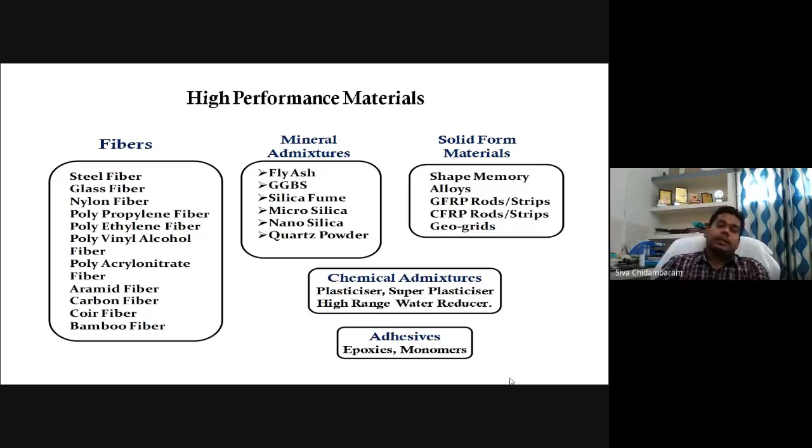According to the required performance, you can choose different types of materials. The materials can be of anything - admixtures in terms of mineral or chemical composition. Apart from this, there are many materials that can be effectively used in the construction field. Many of them are practically applicable, many are still at research level, and many materials are quite expensive, so we have to choose the right location to use them. Let me cover a few of them, since I won't cover everything as people will get bored. First I will talk about fibers, then solid forms, and third, adhesives.

If you look at old buildings, the roof will be a pitched roof, or a flat slab based, like a lime mortar based slab, supported by wooden planks. If you closely look at the wooden planks, they may have been made using a palm tree, otherwise teak wood. If you go to the northeast, the entire structure is made using bamboo.

The reason for choosing only this kind of material is that coconut tree wood can be used, but it has no long life period. So generally, palm tree wood is preferred for making planks. If you look at any pitched-roof old buildings, there you will find palm tree wood instead of coconut tree. Coconut tree wood can be used only for a shorter period; it doesn't have much more lifespan.

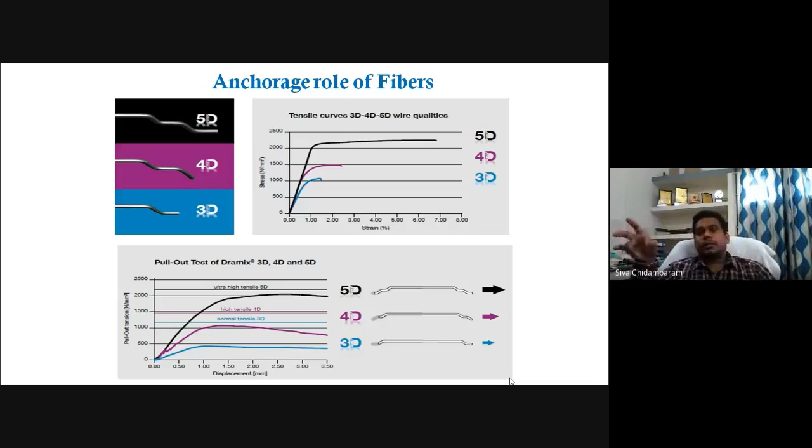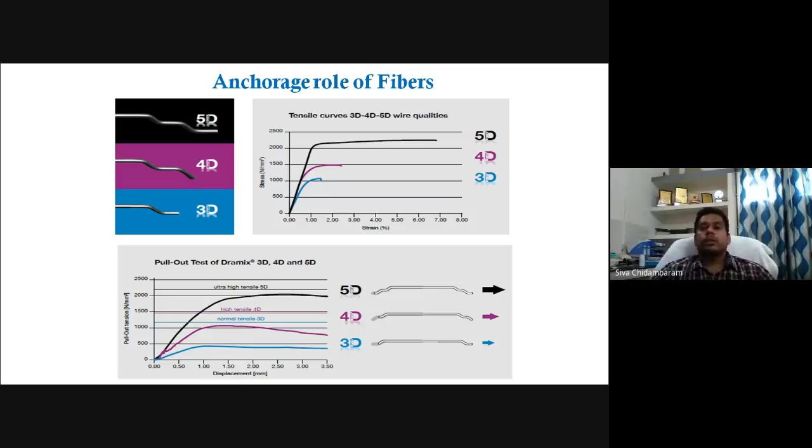Now, if you construct a bridge without abutment, with only the span portion, it is not a perfect one - it should be anchored with the embankment. But anchoring in fiber is nothing but the end profile of the fiber. In hook-end fiber, the end portion has some deformed shape, and with respect to that deformed shape, it gives wonderful anchorage that increases the efficiency of your fiber. But in case of crimped fiber, the shape of the fiber itself gives wonderful anchorage. This is called a crack bridging effect.

When we use these kinds of fibers in our concrete, they bridge the cracks at multiple levels - not at a single point, because the fibers are randomly distributed and randomly oriented. Micro level, nano level, macro level - all the cracks will be bridged by the fibers, trying to transport the stress from one point to another. This is called the fiber crack bridging mechanism.

So why am I telling you all these things when talking about high performance material? The material is a common material which can be used effectively to improve certain performance - ductility, durability, strength, energy dissipation, and crack sealant, which is called the self-healing property of material. So these are the various materials that are available.

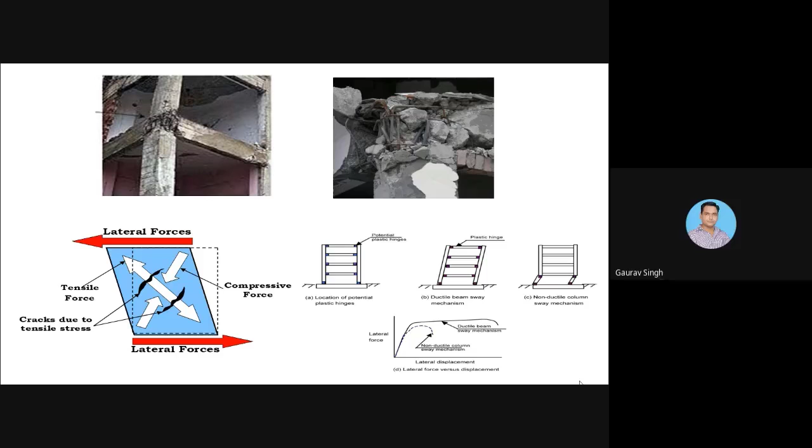When you are considering a structure subject to a large amount of lateral force, our earthquake resistant design philosophy says that we have to go for a strong column, weak beam, so that plastic hinges will form near the beam, not in the joint, to avoid global failure.

When you are using a soft story, plastic hinges should be formed in the conventional way - it should not form exactly below the first story column, to avoid soft story failure. So we have to follow certain IS 1893 guidelines to increase the shear carrying capacity of your soft story building.

So when you do all this design procedure and detailing procedure, we can have wonderful earthquake resistant buildings, but the concrete remains the same - it is a very poor ductile material, a pure brittle material. Even when we reinforce with reinforcement, we are increasing the flexural capacity of the member, but instead we have to use certain material which can increase the tensile carrying capacity of your concrete.

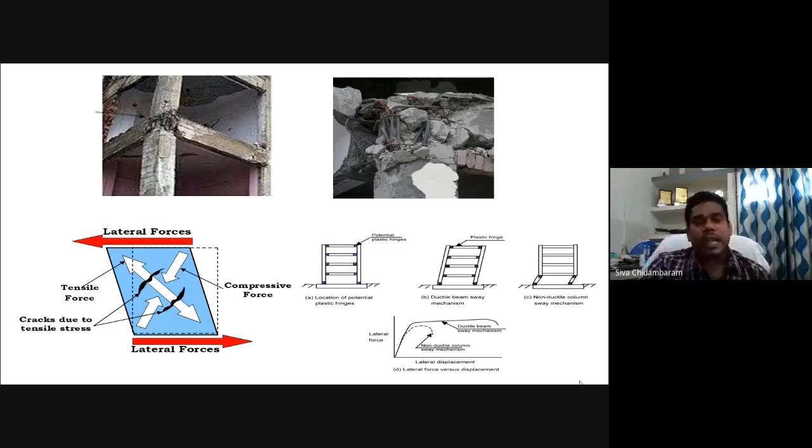When your concrete has wonderful tensile capacity - because prior to this, we should know why the crack is occurring, how the crack is occurring, how the crack is traveling. When you have a large amount of lateral force, concrete is subject to alternate compression and tension in the joint.

So when the applied stress exceeds the tensile stress of concrete, then you can expect a crack. Same phenomena for all the cases. Suppose if my tensile stress of the concrete is 2 megapascal, and the applied stress exceeds 2 megapascal, immediately crack will occur. Till then, the crack will not appear.

So when the crack starts to grow, when the applied stress exceeds the tensile stress of the concrete in every level of your RC elements, the crack will grow and keep on growing. When you measure the stress at the tip of the crack, at the opened level, the tip will have a higher stress level compared to the bottommost crack region. This is called a stress intensity factor.

So crack is generally a good sign in RCC elements. If crack is a sign, like a fever to a human body, crack tells you something is happening to the RCC element. Instead, a building can fail in an abrupt way, which is generally not advisable. So crack is a warning.

So if you are able to treat, if you are able to identify the reason for the cracks, then we can easily retain the structures.

Apart from that, we are doing a lot of mistakes like poor detailing. We are simply playing with the detailing. We say it is very difficult to go for closely spaced stirrups near the joint at the plastic location. We are not able to provide longitudinal anchorage, and we give a lot of useless reasons when it comes to the construction stage.

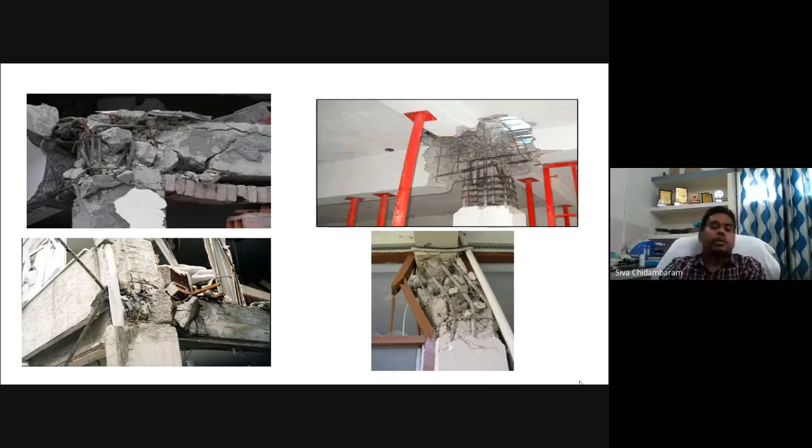But we have to. It can be possible. So to avoid all these kinds of failures, construction people are still not ready to come forward, but the research community is ready to go forward. So they have identified some materials that increase the performance of the element even with some construction errors.

So this is how a plastic hinge is formed. And when you are expecting a plastic hinge at a particular location, my element is going to have a large amount of rotation. So energy dissipation is going to happen, and damping of the entire structure depends on each and every plastic hinge capacity.

Everything depends on the plastic hinge. So I have to improve the performance of the plastic hinge in terms of displacement, energy dissipation, damping, and ductility. So if I want to increase all this capacity in the conventional way, I only have concrete and reinforcement. Apart from this, I don't have any other options.

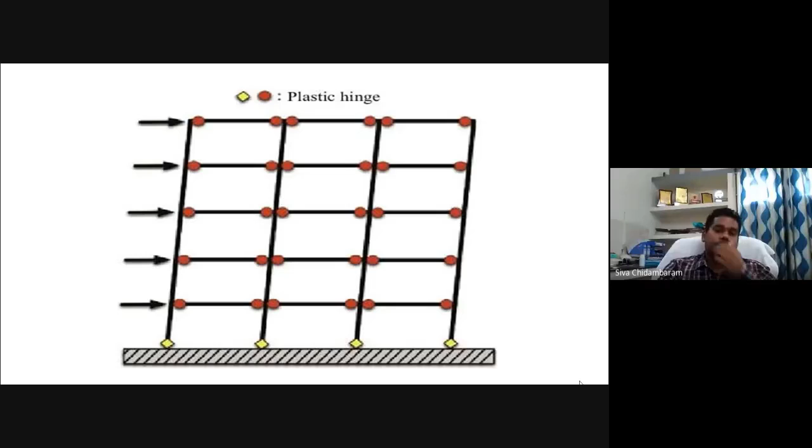You can go for closely spaced stirrups, but even then, crack will occur because of concrete. So now the case comes if I use some fibers, I can increase tensile stress and strain. Strain is very, very important, more so than stress. So what will happen here? A high strain material can help you attain wonderful ductility compared to a high stress material.

So that is called high strength material versus high ductile material. Ductile material will help you. So if you want to arrest all these cracks, we have to use some types of fibers. That's the first option, so I'm going to talk about fibers first, followed by different materials.

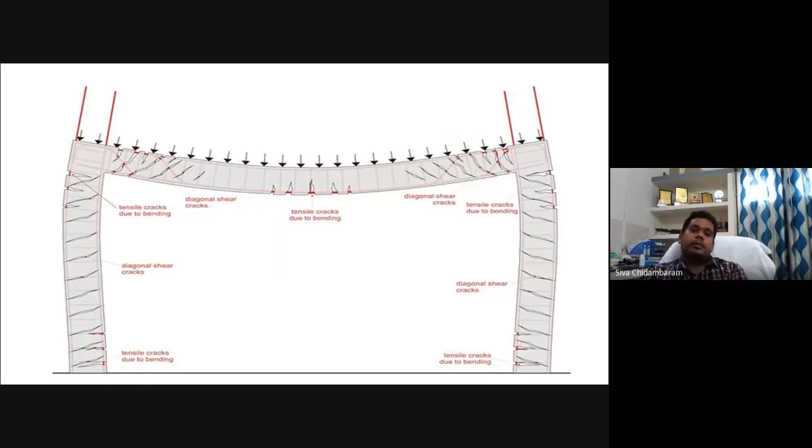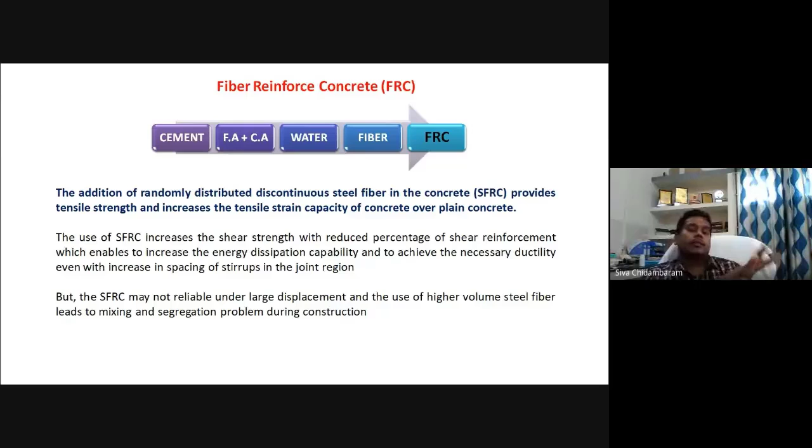In conventional fiber concrete, if you add fiber, that is called fiber reinforced concrete. Conventional concrete can take a certain amount of fiber, not more than 2% of steel fiber. If using synthetic fiber, not more than 0.5%, as that creates a lot of workability issues. When you add fiber, concrete cracks get arrested, and generally the crack will not grow very rapidly because of the presence of fiber. So fiber will bridge the cracks and not allow them to grow rapidly.

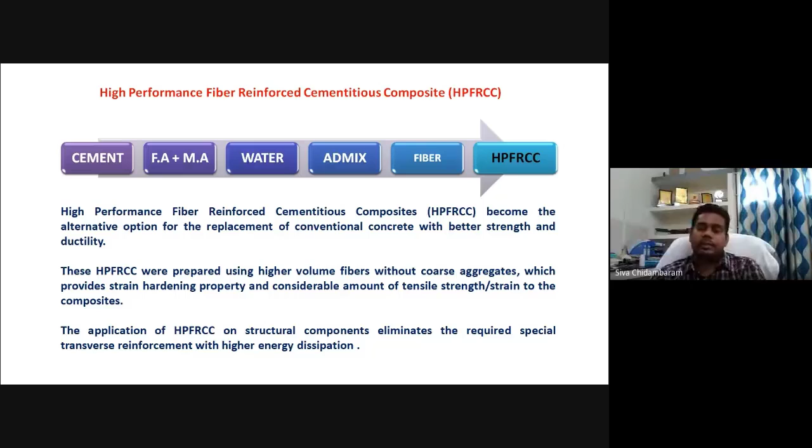Another one is called fiber reinforced cementitious composite, in which cement, fine aggregates, mineral admixtures, and water admixtures plus fiber are used. Here I am not using coarse aggregate, because coarse aggregates are the very big culprit in deciding the dispersion capacity of your fiber. When you use coarse aggregate, that significantly affects the fiber dispersion property. That's the main culprit, which is why in conventional fiber reinforced concrete, we are not able to go more than 2% of steel fiber.

So in a study conducted by myself, we used fiber reinforced concrete and fiber reinforced cementitious composite. If you closely look at the stress strain diagram, you can understand the stress of fiber reinforced concrete is higher than the stress of fiber reinforced cementitious composite, but the strain is 2 times higher than the conventional fiber reinforced concrete. So what happens when it comes to damage capacity?

If you look at the bottommost cylindrical sample, you can identify the different type of failure pattern. Conventional concrete falls apart, fiber reinforced concrete holds the cracked portion together. The composite is also holding, but crack intensity is not much. That is the beauty of fiber reinforced cementitious composite.

Similarly, for tensile strain capacity, look at the topmost graph. Conventional fiber reinforced concrete's ultimate tensile strain capacity is just 0.004. When it comes to this composite, achieving 0.02 strain is not an easy task with conventional fiber reinforced concrete. This is why it is called a high strain material, sometimes termed a strain hardening material. Okay, let us come to the flexural case.

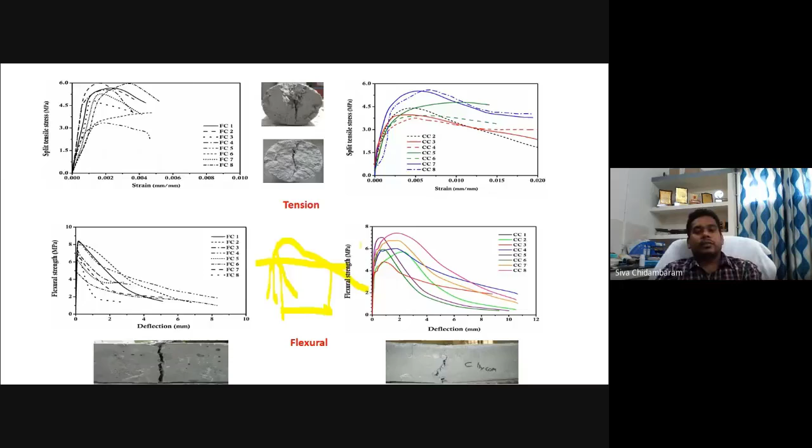So I'm not talking about fiber reinforced concrete. This presentation talks about fiber reinforced cementitious composites. There are many types of composites. I'm going to discuss only a few of them.

One is called slurry infiltrated fibrous concrete. It's very old, from 1984. This composite was invented to resist the impact force caused by missile attack in the United States, by Professor Lankard, in which we are not using reinforcements, we are using only steel fibers in higher volumes.

In conventional fiber reinforced concrete, you can't go more than 2%. Here you can go from 5% to 30% steel fiber, depending on your economic criteria and requirement. It's one of the high ductile, high impact resistance, high toughness, high energy dissipation, high damping materials, whatever property you want.

100 megapascal concrete, just like this, you can easily attain with this. And the flexural strength to compression strength ratio is very high, it's unimaginable. These are various advantages of SIFCON, in which the fiber will be randomly oriented or perfectly oriented in a layer by layer manner, and then slurry will be infiltrated.

The second layer will happen, slurry will be infiltrated, the third layer will happen, again slurry will be infiltrated. So this is how we have to make it.

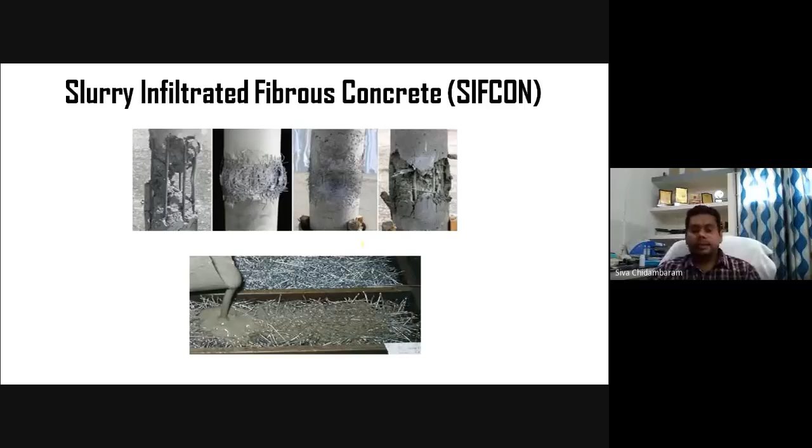So it has a lot of restrictions, like the formwork should be plug free, it should be leak free, number one. So a perfectly made formwork is number one. We should not use a compact vibrator to vibrate this, only a small amount of vibration has to be done. If your slurry is infiltrated improperly - slurry is the backbone of your SIFCON - then you can't attain the desired performance. So there are a lot of limitations.

Apart from this, it has wonderful applications in construction using this composite. If you want to make a beam or column, these are very critical things. So wherever it is possible, like impact resistant slab panels, can be easily made using this. Nowadays we have some advanced instrumentation and equipment to disperse the fiber, so now we can try, but the orientation of the fiber is very difficult.

Because in SIFCON, fiber orientation matters - whether it is perpendicular to loading or parallel to loading - depends on the orientation, the performance varies. If you look at the stress strain curve, one curve shows that parallel to loading gives lesser stress and strain compared to perpendicular to loading. Perpendicular to loading, you can look at the second image - here fibers are oriented perpendicular to the loading, here fibers are oriented parallel to the loading. So with respect to this, the performance varies.

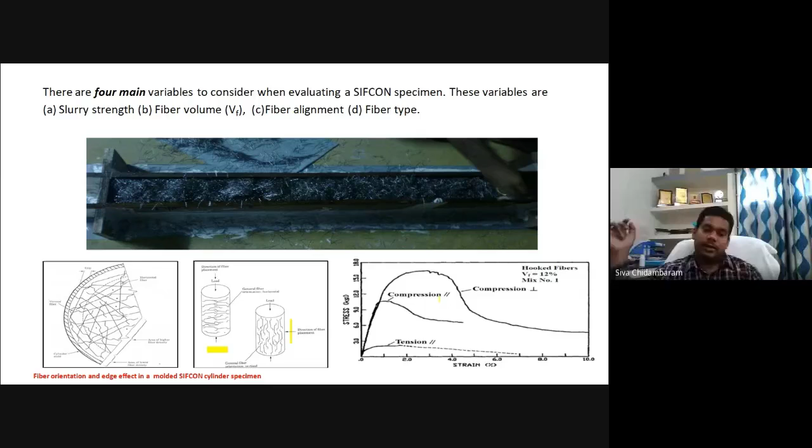So tensile behavior is wonderful. Now, how can we do a SIFCON testing? You can't make a cube in a conventional way. You have to make a prism and cut the prism into a cubical form to do the testing. That's the right way of testing.

If you look at the internal face, you can see this image, the first image. This is the cube specimen we have dismantled, taken as a core from the prism. This is how the internal structures will be.

Even with perfect orientation, perfectly made, you can see in this portion the fiber presence is very less. Even with perfect effort to make it wonderful quality, there are still human errors. It's very difficult to control at the site level. At the lab level it is difficult, and at the site level it is even more difficult.

So what is the advantage? In the second image we can see around 1 centimeter of compression, and the sample expands laterally. A square cube becomes a rectangular sample like this.

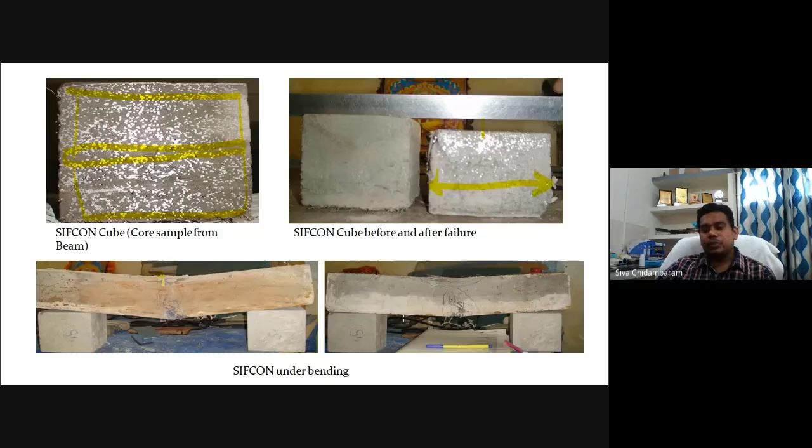So how does it behave under bending? There are no reinforcements, only fibers. If you look at the cracking pattern, wherever the fibers are not present, it travels like this. It's not like the conventional way, where you can expect a crack like this. In this case, it is completely different, and it follows the path of weaker points. Instead of the crack traveling straight, it travels trying to find the weaker point.

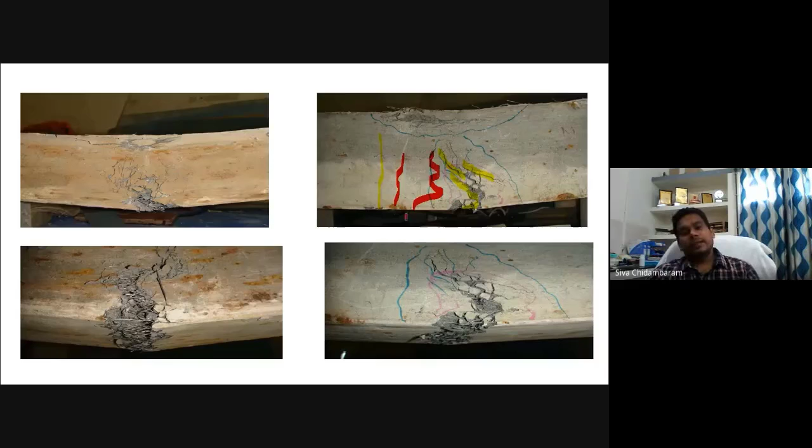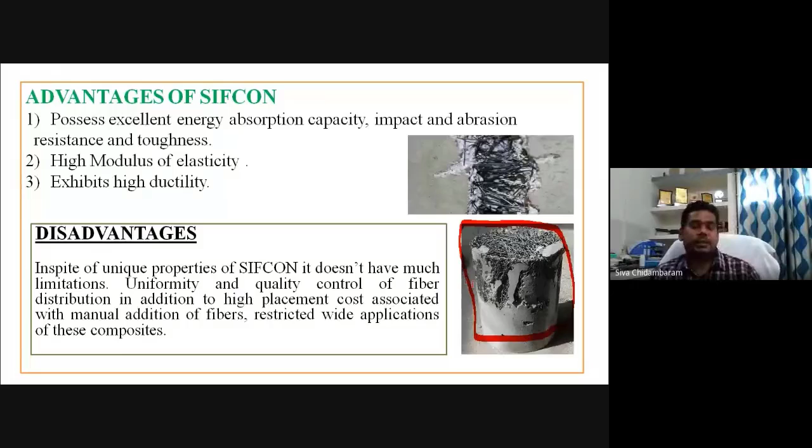The same thing can be observed here. So these are the advantages of SIFCON. SIFCON is a wonderful material, but if you make a small mistake, your SIFCON will become like this, and you can't get any desired performance from it. So these are the limitations.

Next is engineered cementitious composite, developed by Professor Victor Li, in which he has used polyvinyl alcohol fiber of 2%, fine admixtures in terms of fly ash, GGBS, microsilica, etc., cement, sometimes sand, sometimes no sand, then fiber, water reducing admixtures, and high range water reducer admixtures.

There are two admixtures used to disperse the fiber, so that fiber segregation does not happen. So many things are involved.

If you look at the articles published by Professor Victor Li and his students, you can identify a lot of properties of ECC. If you take a tension sample, you can see that after yield, the stress goes like this. This is called strain hardening.

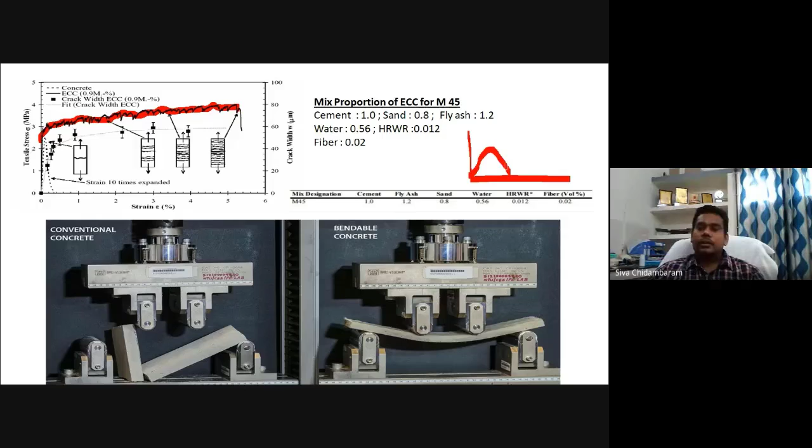Getting strain hardening is not an easy task. This is the conventional failure, called strain softening. This is called strain hardening: when you apply the stress, after yield, the stress increases as the strain increases. Under tension, getting strain hardening is not at all easy, like it is with conventional reinforcement.

The ECC provides this, and you can see a prism deform like this. That's why Professor Li calls this composite a ductile or bendable concrete.

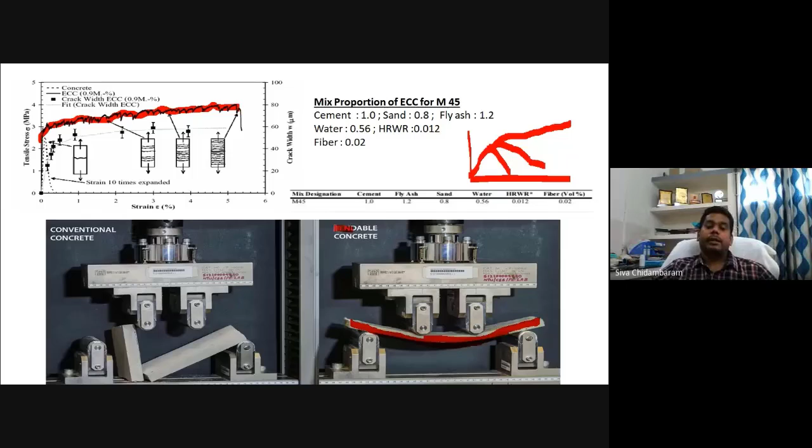So now you can ask me, can I use this in a building? Yes, of course you can use this in buildings, bridges, dams, everywhere. But the condition is, it's not economical, so wherever the demand is, there we have to use it. For example, if you want tall structures, a coupling beam has a lot of demand for flexural capacity, shear capacity, and ductility capacity, so we can use this.

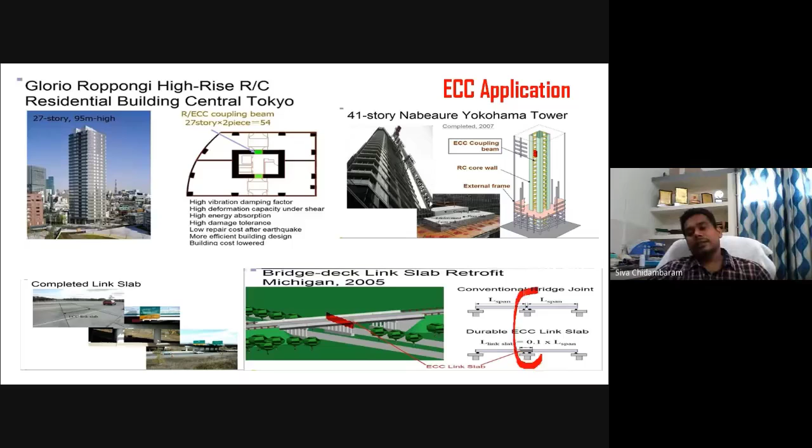When you cross a bridge, from one span to another, in India you feel a certain amount of vibration because the gap between spans creates that vibration, since we are not treating it perfectly. So what they have used exactly between the spans is this ECC. They have converted the connection like this, and it becomes wonderfully smooth.

You can use this kind of material as a retrofitting material in bridges, dams, buildings, etc. When using this composite in the joint region, you can eliminate the need for closely spaced stirrups, and increase shear carrying capacity, energy dissipation capacity, damping capacity, and damage tolerance capacity, so your building can undergo a larger amount of deformation with significant damage and still be retrofittable.

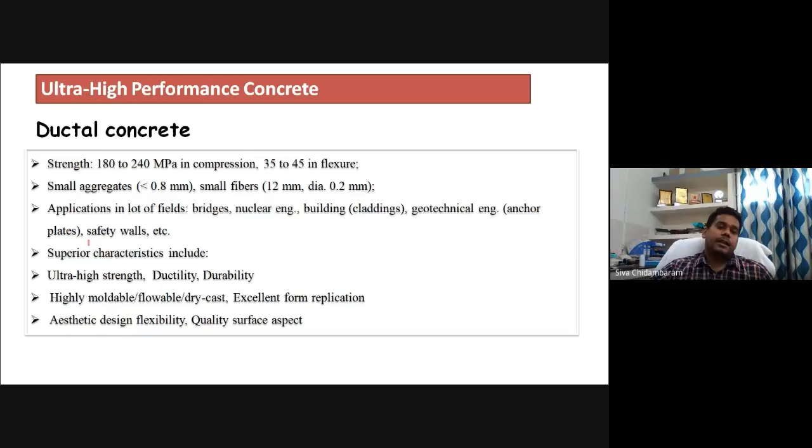Another one is called Ductal. Ductal is a branded name, a patented product. Ductal concrete can have strength up to 240 megapascal, and flexural strength of 45 megapascal. So it's a very high strength, high ductility material. What is the advantage of such a high strength, high ductility material?

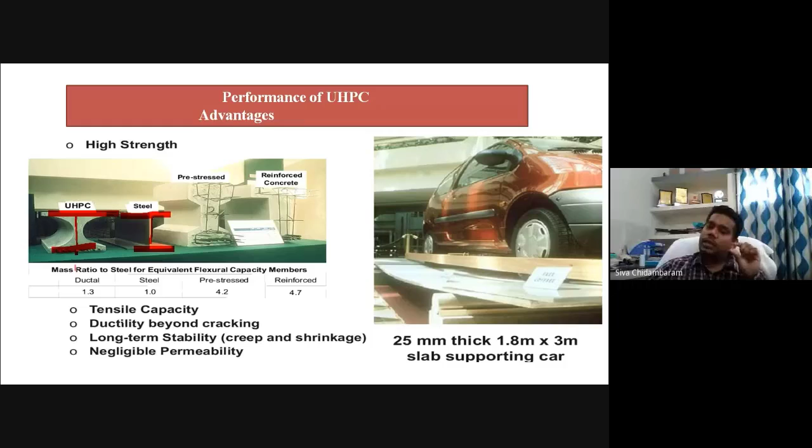Now, a small 25 mm thick slab is carrying the load of a car. That is the advantage of your ultra high performance ductile composites. So how does it work generally?

When you are going for normal concrete, you have coarse aggregate, fine aggregate, and a lot of pores present. These pores generally make the concrete weak.

When it comes to this kind of engineered cementitious composite, ductile, or any kind of composite, this is fine aggregate. The pores are filled by fine mineral admixtures at a micro level, nano level. So it has a wonderful property - this is almost a void-free composite.

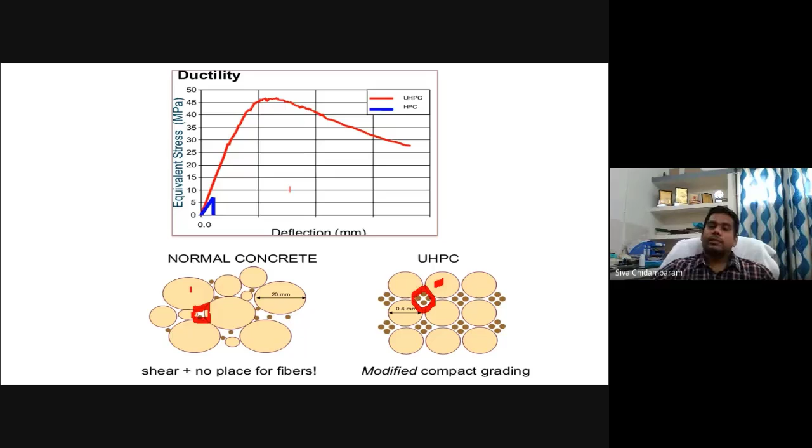So when you apply axial force, the minerals are not dislocating because of force, and it is providing wonderful resistance to the applied stress in terms of tension, flexure, and compression. Apart from the structural purpose, it can be used for architectural purpose too, so that we can reduce the thickness of any material required, and cross section can also be reduced.

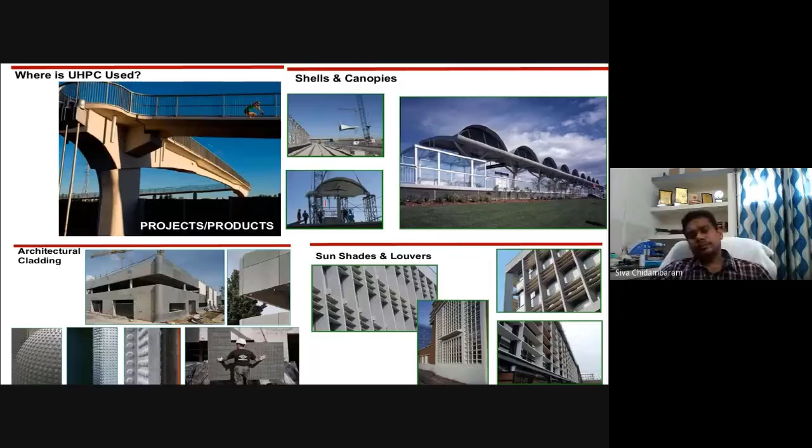Next one is called slurry infiltrated micro reinforced concrete. So what is called micro reinforced? This is almost equal to SIFCON. But in SIFCON, we face trouble in keeping the fiber orientation and many other things.

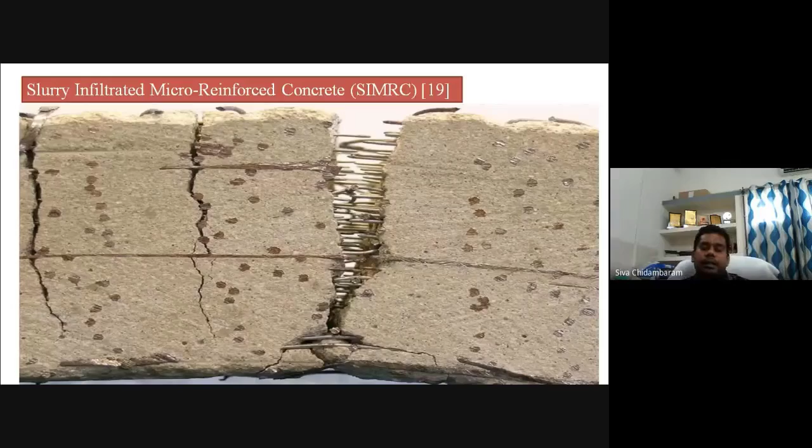So in SIMRC, what they have done is cut a lot of steel wire mesh, in a desired orientation, and then slurry will be infiltrated.

In addition to this, if you want to add fiber, you can add the fiber. So concrete can be pumped or poured like this, it can be filled, so your composite is ready. Again, these kinds of composites are not meant for direct structural applications, because we have to choose the right locations and right purpose for them to be used effectively.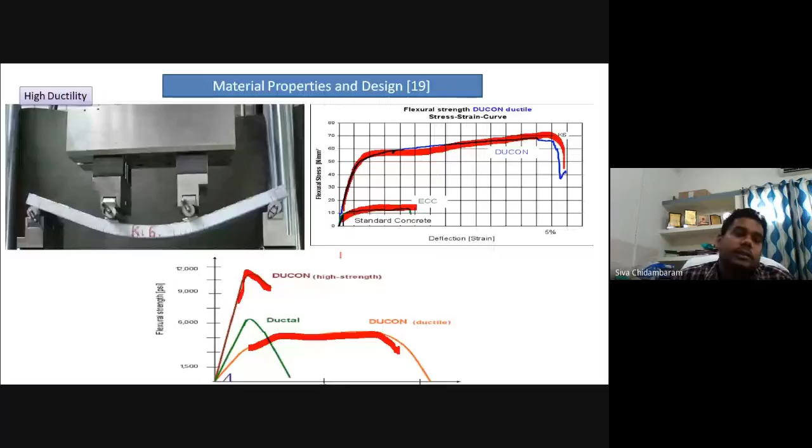The mesh can be available locally in our country. You can go and find the material in any hardware shops. But how the materials are being used for different applications matters.

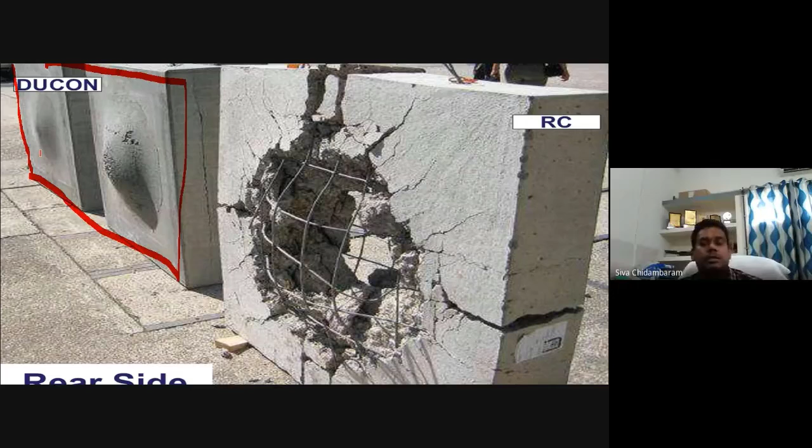So when we use this kind of material for impact resistance, for our army purposes or for slabs, it can be effectively used more than for beam joints or beams, etc. If you are using it for beams, have you ever seen such kind of failure?

You can see the beam fails like this. It's not split into two halves. If you look at this, a beam deformed in such a way - this much amount of deformation happened due to the composite, due to the fiber presence and mesh presence in this composite. So the failure pattern is completely different, and the mode of deflection is also completely different with respect to the composite used. So this is why it has a wonderful toughness and damping material.

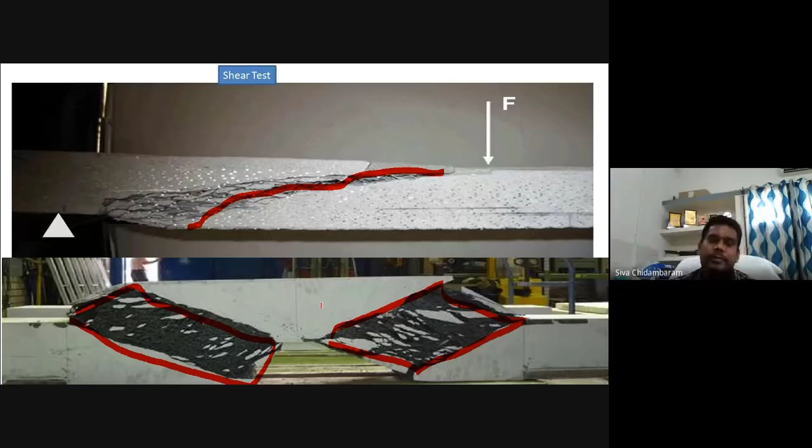That's why it is being preferred for impact resistant structures. So now, obviously, when we have different types of materials, we will try to use them for our structural purpose. Similarly, this can be effectively used for strengthening bridge piers and columns. So you can make the confinement like this, and then you can pour that slurry.

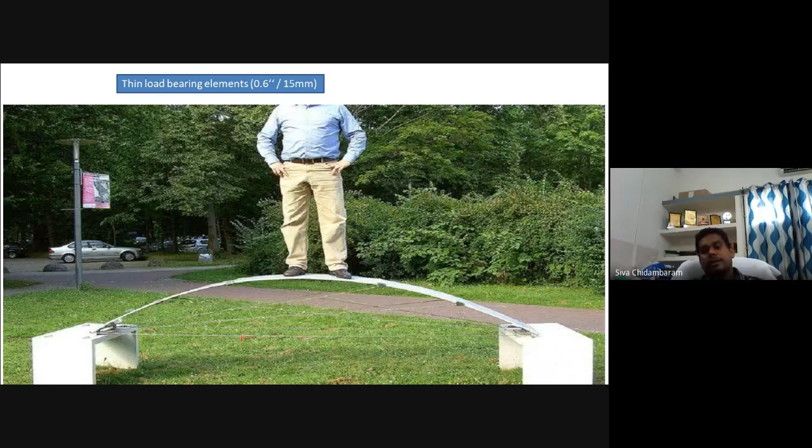So this is a small introduction about the different types of fibers and how we have used them in fiber reinforced cementitious composites.

Now I'm going to enter into a concept called self-healing concrete. What is self-healing concrete? Self-healing means the concrete will heal itself. Generally, concrete doesn't have this healing property.

There are multiple mechanisms out there, like developing bacterial concrete. You would have heard about bacterial concrete. When they grow bacteria, the bacteria will fill the pores and cracks. That's a kind of mechanism, that's a kind of healing.

Now, this is not like that. This is a kind of adhesive-based healing, in which you can see primer and hardener. There are two components. When you go for epoxy, you will have two parts, hardener and primer, part A and part B. If you add these two together, then only it will become a perfect adhesive, like in epoxy.

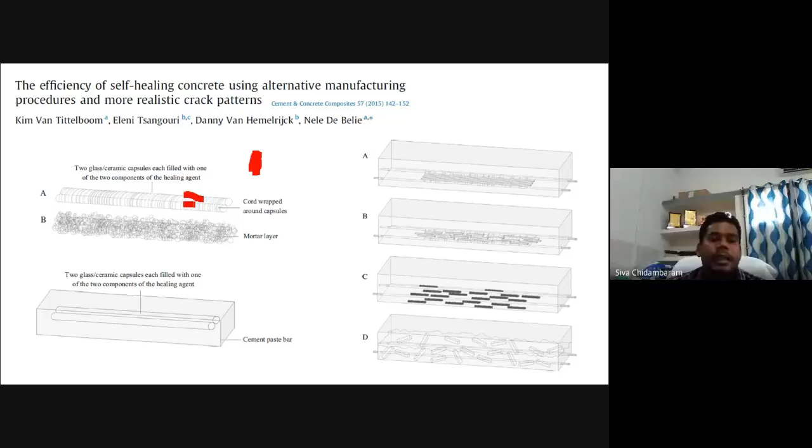Similarly, we have a part A and part B, separately filled in brittle glass tubes or any tubes like capsules, like our normal medical capsules. You can make the capsules. They will be wrapped together, and then a small amount of cementitious layer will be applied so that it will have a wonderful bonding with the concrete.

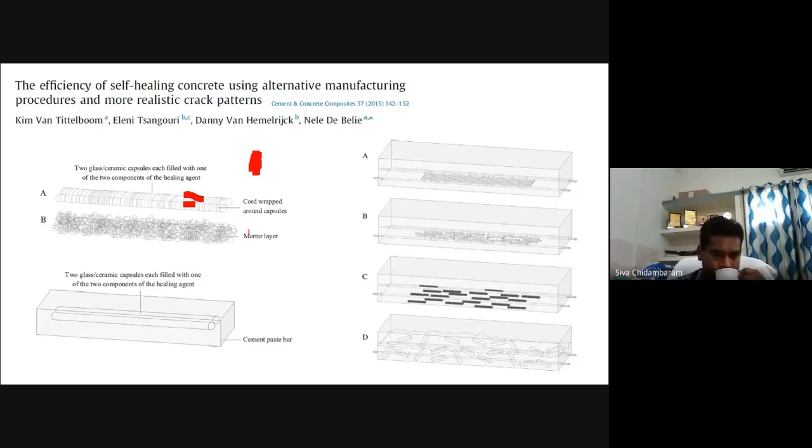Now you have a prism or a beam. What do we have to do? When you apply a force like this, you will experience a crack from the bottom side because there is a tension face. So we are not going to have an immediate crack in the compression zone, only in the tension zone will we have the cracks.

So we have to place these kinds of capsules exactly at the bottommost points, like this. They are kept perfectly oriented and randomly distributed, like randomly distributed cracks. These capsules have adhesive chemicals inside them.

So what will happen when a beam is trying to get cracked? The capsules will break. Since it's a brittle material, the capsules will break. When the capsules break, the hardener and primer will leak gradually, slowly, and because of the gravitational force, it comes down.

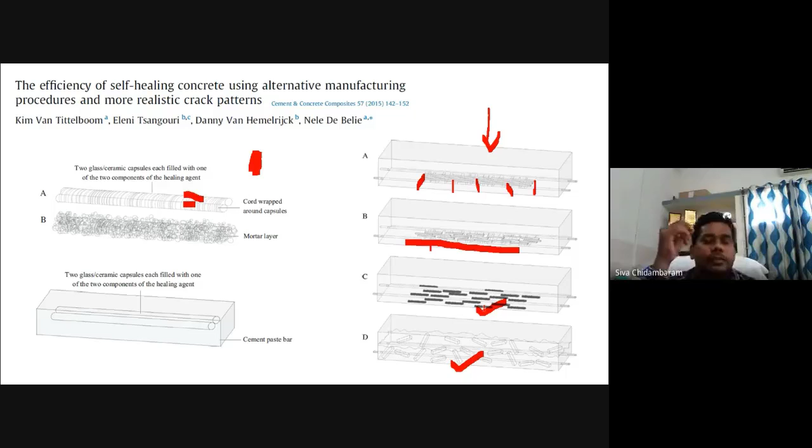So when the two parts, hardener and primer, combine with each other, they will try to penetrate through the cracked surface, coming down because of gravitational force. Since these are very fine cracks, the penetration will be very gradual. When they meet together, it will get set, so the epoxy or adhesive will fill the crack internally. So the crack is filled internally.

Once the epoxy has filled the cracks, the epoxy will try to set. There are two ways: one, after reacting with the hardener, it can mature or cure itself. Otherwise, some chemicals require ultraviolet treatment, or when the epoxy is exposed to atmosphere and reacts with sunlight, it will mature itself and come to its curing temperature. Once the epoxy attains its curing temperature, it will start to mature itself.

Otherwise, we have to apply UV treatment. When you use UV treatment, these exposed adhesives will start to get cured and become a hardened property that creates a bond between the cracked surfaces.

For example, they have applied it like this, and there are a number of cracks. Wherever I have made the red color mark, the capsules are present. The capsules get cracked, and you can see the epoxy infiltration through the cracks.

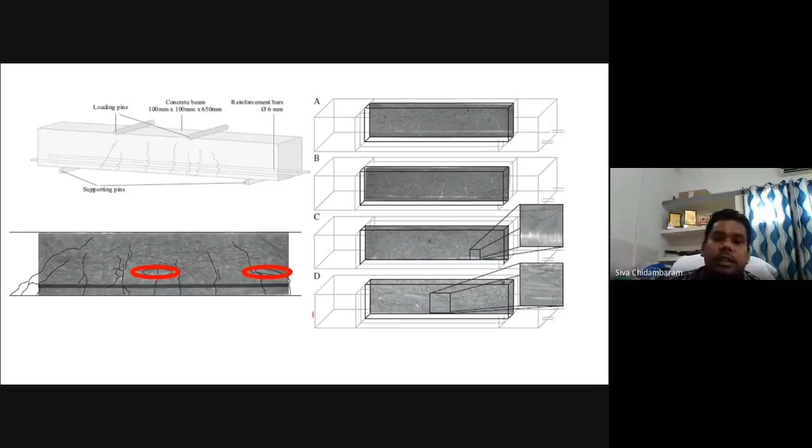So once the ultraviolet light is passed over these, or otherwise when the adhesive is exposed to sunlight, it generally matures and becomes hardened, connecting the cracked surface. This is a small introduction to what is called self-healing concrete. This is how self-healing concrete works and helps arrest minor crack formation in structures.

It is still at the research level, and now they are trying to apply it in various structures, because there are a lot of questions that come up in this case.

You may ask me, generally epoxy has a shelf-life period, so how can we use it? Yes, of course, we do have a shelf-life period for every chemical. Once the chemical crosses the shelf-life period, it won't work properly together. So we have certain limitations. We have to choose the right long-life chemicals, and they should be perfectly bonded together. Otherwise, once the hardener breaks but the primer doesn't, then again it is useless.

If you think you can use a chemical which does not require a hardener, no. Take the example of Fevikwik. Fevikwik, when it reacts with the atmosphere, sets immediately, but it has a shelf period of certain days. Once you keep it with you without opening it, it will mature. So that also we have to think about.

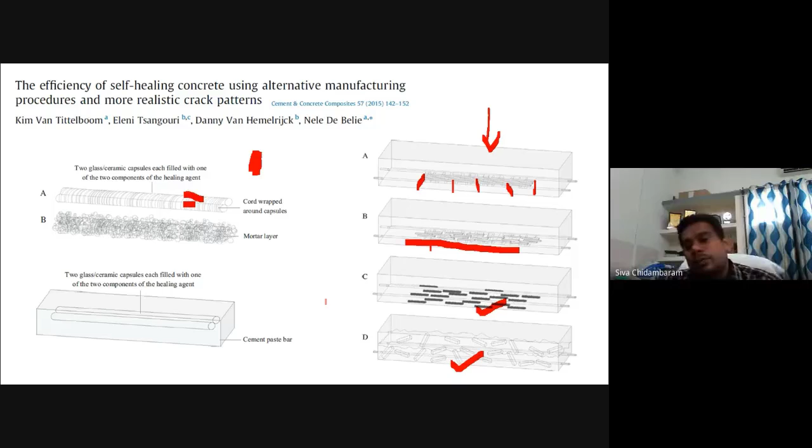So generally, part A and part B based chemicals are preferred, similar to epoxy based systems, but they have a lot of limitations. So a lot of research is going on in this field.

One of the emerging fields, the next one, is called shape memory alloy. This alloy is named shape memory alloy. It was invented by certain persons using nickel titanium alloy. They named nickel titanium alloy as shape memory alloy.

I will tell you the exact reason for this image, why I am keeping this image. I will tell you in the later stage.

Initially, nickel titanium alloy was developed by William. They were discussing this in a meeting, where William proposed that he had developed a wonderful material called nickel titanium with a lot of advantages. Initially, he made a small thin wire. They gave this wire to different people. One of the committee members, Mr. David, was playing with the small thin wire, rolling it. He had a lighter and simply fired the wire, and it became straight. He was shocked and surprised.

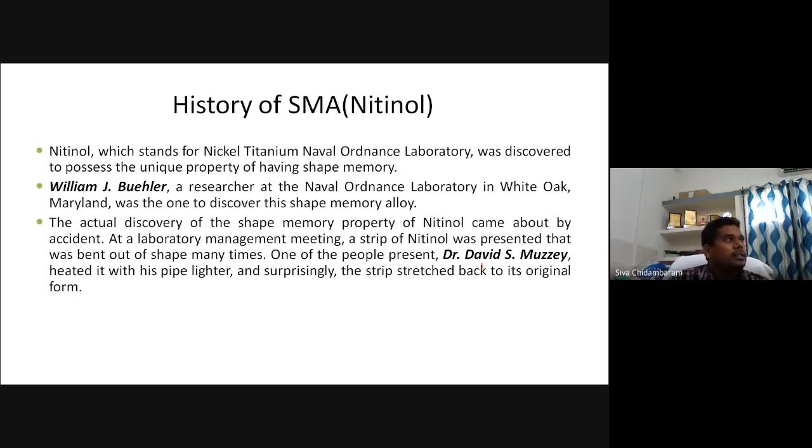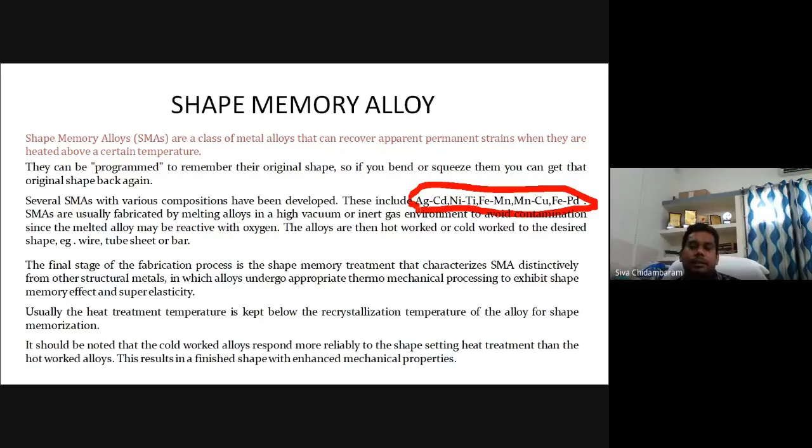So how does it work generally? Nickel titanium is a very costly material. So they have done a lot of research and made different chemical combinations, in which steel with nickel or manganese is quite economical compared to nickel titanium.

Basically, heat plays an important role in shape memory alloy. This is called the shape memory effect. There are two types: two-way shape memory effect, and superelasticity, also called pseudo shape memory effect. When you heat the material, it becomes the original shape - that is one type of memory. If you heat the material and it goes to another shape, that is called two-way shape memory effect. By cooling, it will go to another different shape. Pseudo elasticity means that without heating or cooling, when you remove the applied stress, it will come to its original shape.

That's called pseudo elasticity. Now I will go to the first image. Nowadays a lot of advanced treatments are available. If you look at the image carefully, there is a spinal cord. Nowadays you can see a lot of aged persons whose height becomes short - they tend to bend because their spinal cord loses capacity and is not able to hold them perfectly vertical.

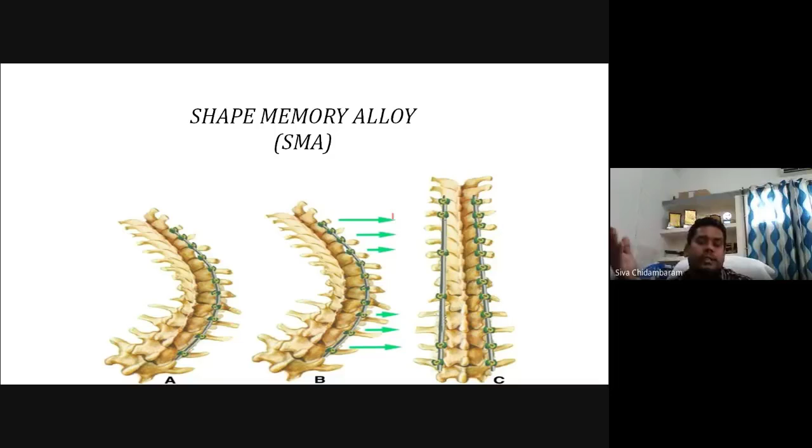In such cases, you can use a shape memory rod tied exactly along the spinal cord like this, which should be a pseudo elasticity shape memory alloy. So when you deform it and then release the applied stress, it will try to come back to its original position. You can easily bend it, but based on the property of the material, it will try to pull you back, giving additional support to bring you back to the original position. So a person with a deformed spinal cord shape can use a shape memory alloy to make it straight. That's why I showed you this image - this is how it works, one-way, two-way, etc.

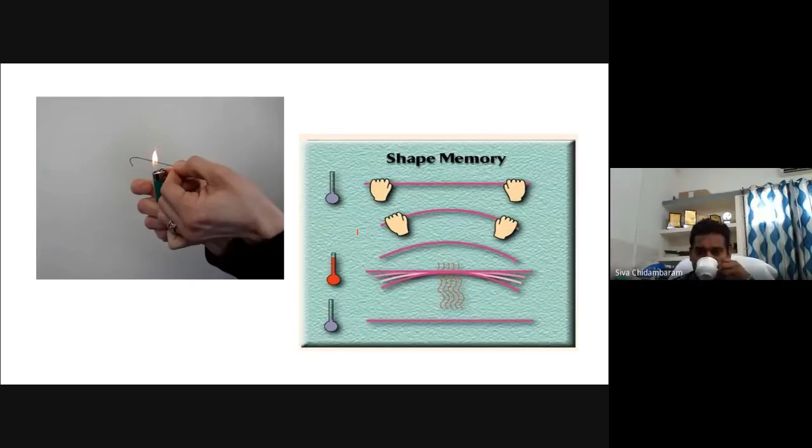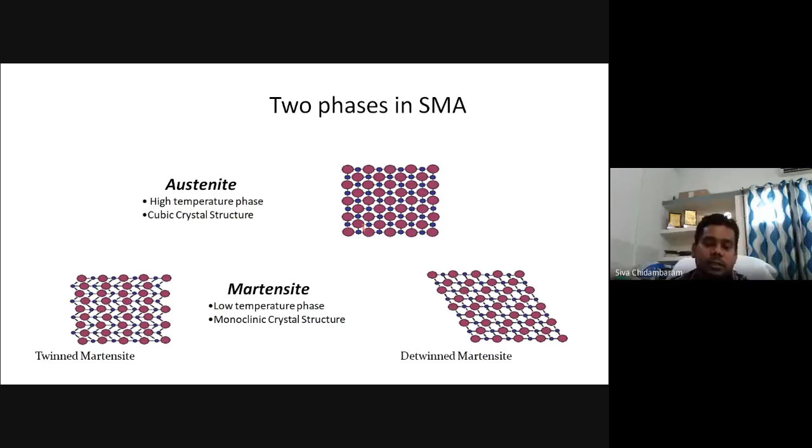The reason for this is that there are two phases in this material: one is austenite, another is martensite. When it's at high temperature, it becomes austenite, and when it comes to a low temperature phase, martensite happens. So this is how the internal atomic crystal structures are deformed to bring back the real shape and have the memory effect.

So, apart from this, how is the performance? This is predominantly used in the medical field. If you have a head injury or some operation in the brain, they will remove the skull. The skull can then be made using shape memory alloy, because it is not corrodible. So it can be refilled exactly at this location, and you can give it a perfect shape.

Glass frames, and nowadays many endoscopic-based operations, people are using this kind of memory alloy. These applications can be used, and it is available in the form of rods, wires, etc.

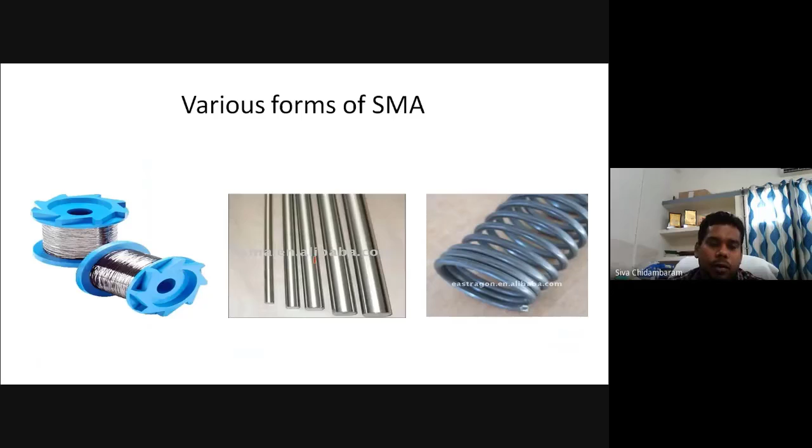Now, when you have different materials, obviously you will try them in RCC structures. So it has a wonderful recentering capacity - that is called recentering capacity. When you apply a stress, it comes back to its original position. That is called recentering capacity.

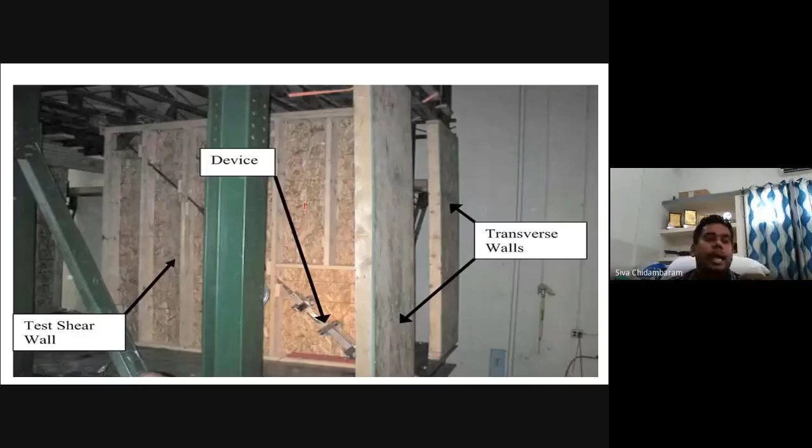So one study has focused on how to use this particular material as a damper. Because the role of the damper is to dissipate energy and try to bring it back to its original position. This SMA has its own inherent property called shape memory effect, and its recentering capacity. So it tends to have this, but the SMA is not an energy dissipating device - it has a capacity for recentering. So in an additional damper, in an existing damper, you can use this particular device so that while the damper dissipates energy, this SMA will try to pull it back to its original position. So it's a combination of things.

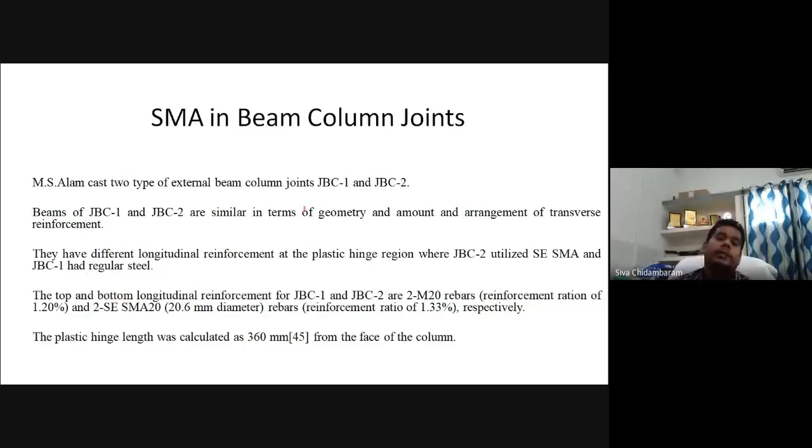Similarly, they have tried this with bridges and some church towers to rectify this. Some bridge piers they have studied. One study has been done exactly at the beam-column joint to study its behavior under cyclic loading. Exactly in the joint region they have used SMA. So this is how it has been corrected.

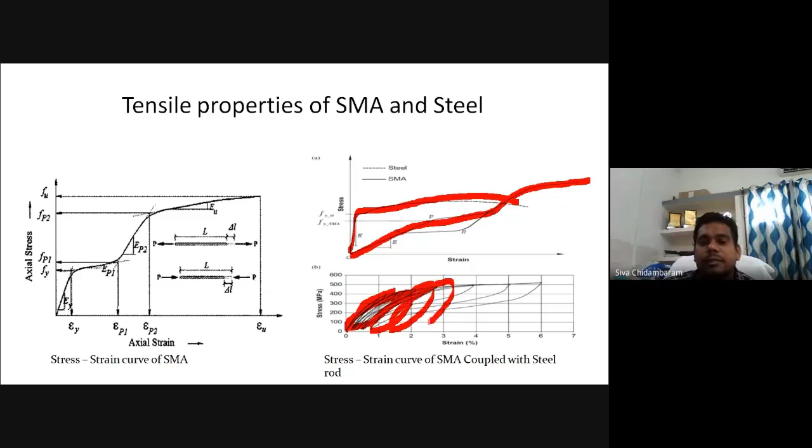So they have tested this under cyclic load. This is the conventional one, and this is the shape memory alloy. So it tells you that SMA can recenter your beam-column joint, but it doesn't have the capacity to dissipate energy. So it has less energy dissipation capacity, but it has the capacity to recenter the beam-column joint.

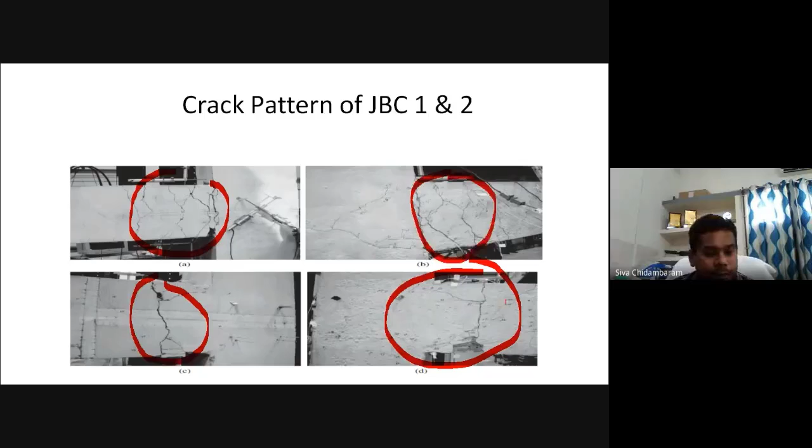You can see the conventional beam-column joint failure, and this is the shape memory alloy failure. It brings the joint back to its original position and experiences similar cracking to conventional. So this is the capacity of your shape memory alloy based beam-column joint - it will not allow you to dissipate energy, but it can bring the beam-column joint back to its original position.

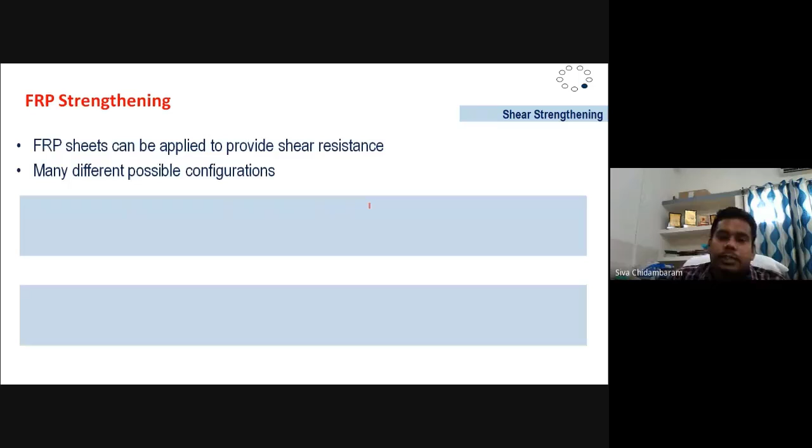So the next one is called FRP wrapping. Everybody knows FRP wrapping, and everybody may tell me, sir, we know about FRP strengthening, so I won't focus much on this. I will focus only on pre-stressed FRP. FRP, everybody knows, is fiber reinforced polymer - polymer meaning the epoxy we use to strengthen.

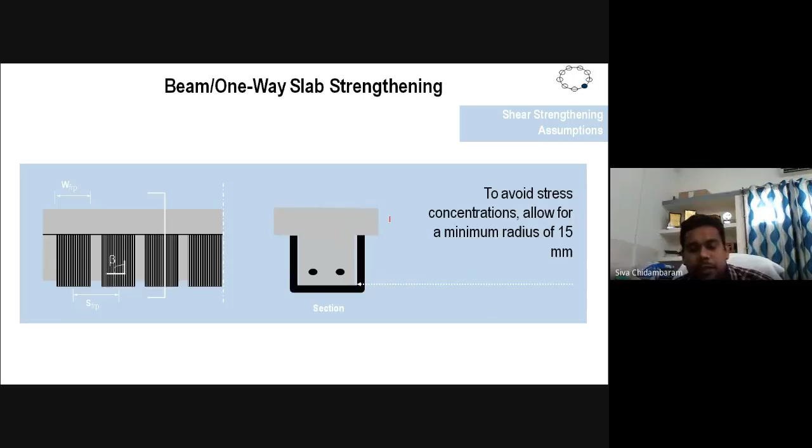It is a performance-oriented material because instead of going for RCC jacketing, you can use thin FRP, which will not increase the cross-sectional size of your RCC structural elements. Without increasing the cross section, you can increase stiffness and strength, but you can't increase ductility - that's not possible using FRP in beam strengthening. When you use a number of layers, you are increasing the strength, not ductility. That's the limitation of FRP.

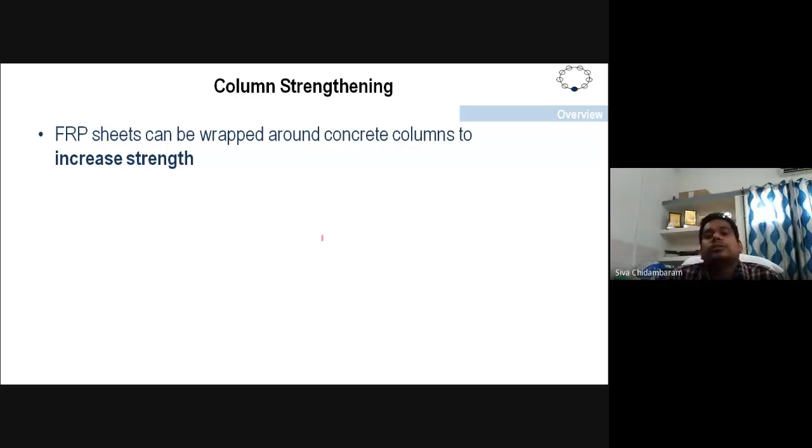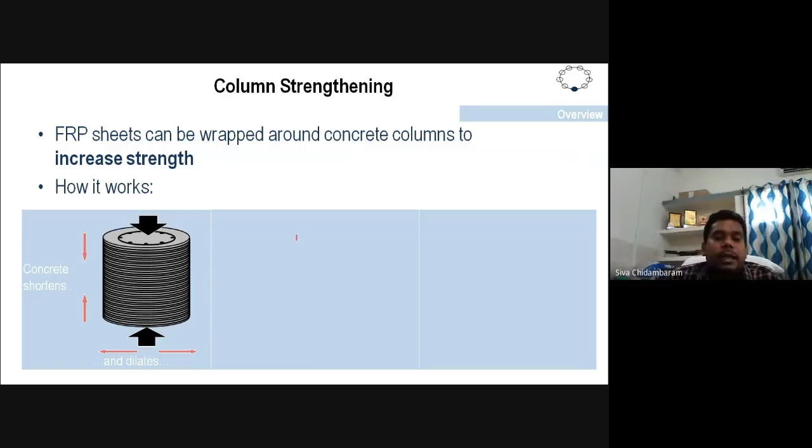In columns, generally, when we apply a uniaxial force, we experience it becoming biaxial. But when you use FRP with epoxy, it becomes triaxial. When you apply axial force, the concrete tries to split horizontally - that is another force called biaxial. But when you use FRP wrapping, it gives you another force inwards, which is why it is generally termed a triaxial force when you wrap FRP in columns.

So another additional application is called near surface mounting. If you want to increase the flexural capacity or shear capacity, instead of using FRP wrapping, you can just make a groove and use FRP plates or FRP rods with epoxy. This is called near surface mounting technology.

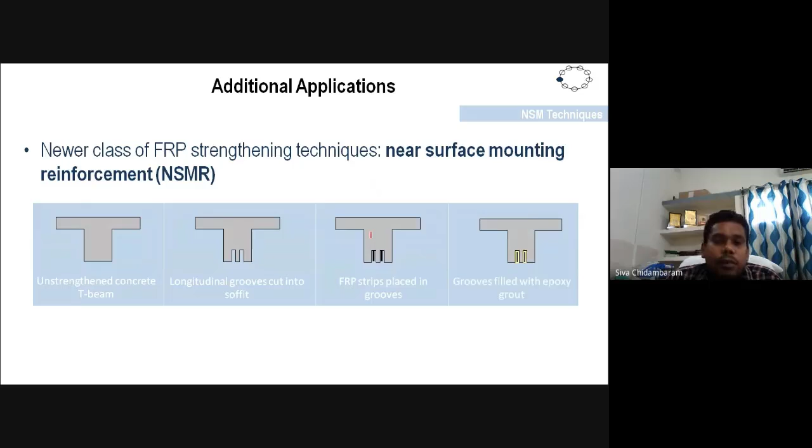Just using FRP alone will not be good enough - it's not that simple. If you are using FRP, it should be perfectly designed.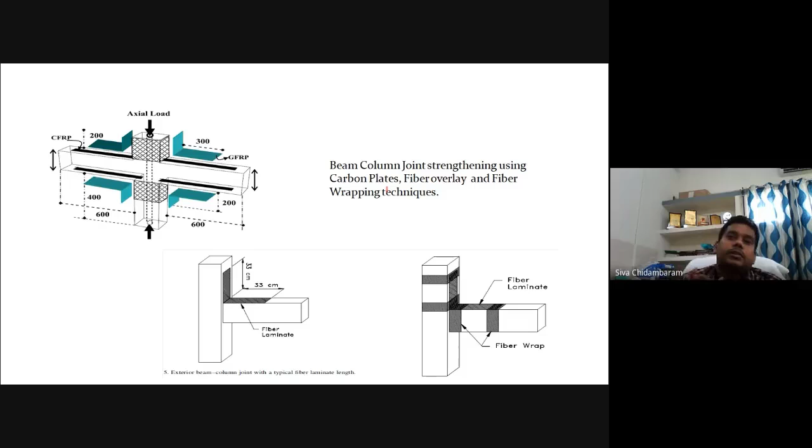Otherwise, the FRP strengthened portion becomes stiffer and higher strength compared to the unstrengthened portion. So failure will focus on the weaker point - your strengthened portion will become solid enough, but the weaker point will have severe distress. So when you are using FRP strengthening, the entire building has to be redesigned perfectly to safeguard the structure. This is how the conventional strengthening will be.

If you look at FRP studies, failure of FRP will generally be in terms of delamination, because the modulus capacity of CFRP is very, very high compared to glass. So glass generally will rupture, and predominantly CFRP is preferred for strengthening purposes like this.

When you do strengthening like this, when the element is subjected to a large amount of lateral force, monotonic etc., the fiber will take the stress up to a certain limit. Later, the interface matrix - the epoxy - loses its strength and bonding ability, and it will not transfer the force to the FRP, and the FRP will delaminate.

FRP delaminates because the epoxy we have used is not able to transfer that much amount of force. So the FRP generally delaminates - combined, it can take the load, but we are not able to use the efficiency of the FRP to a maximum extent. We are not able to use it fully.

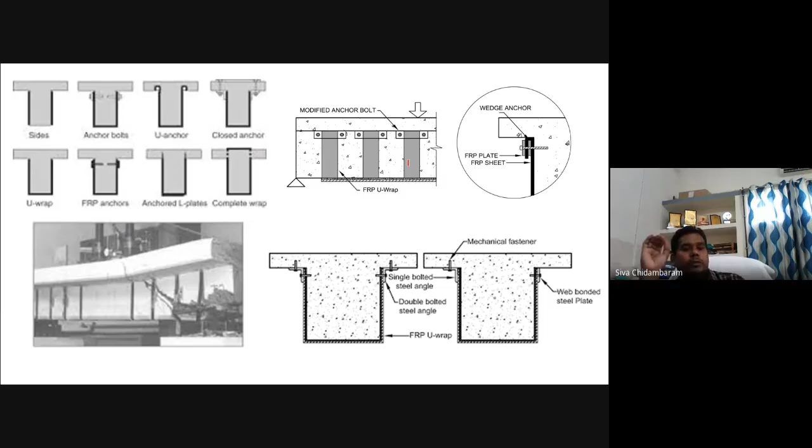So the important way in FRP wrapping is its anchorage. Similar to fiber reinforced concrete, here also the end anchorage plays an important role. So when you are doing U-wrapping like this, exactly at this point we have to do end anchorage like this. They've got an end anchorage.

You can see the end anchorage will be like this. This is nothing but we have to roll the FRP and then insert some FRP plate or non-corrosive plates, any plates, and then it has to be anchored with the beam using some bolt.

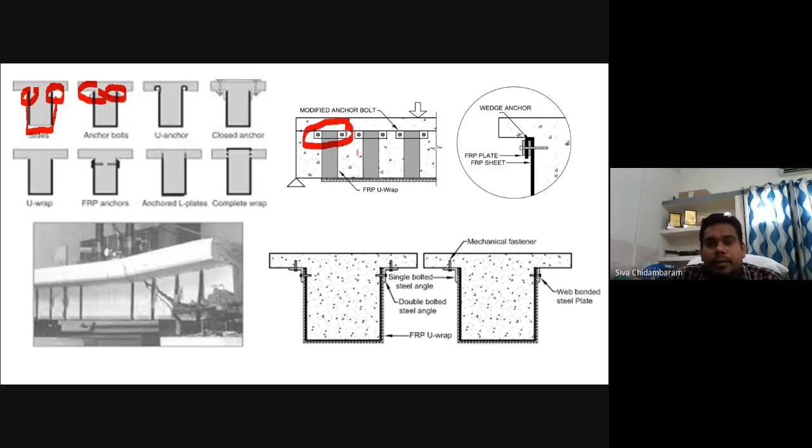When you are anchoring like this, it will not allow the FRP to delaminate, number one. For example, without anchorage, this is called unstrengthened, and this is strengthened - the strength is increased, but delamination occurred.

So when you are using external anchorage, it becomes like this. Similarly, when it comes to pre-stressed FRP, the same can be attained using pre-stressed FRP - this is for pre-stressed FRP.

When you are using FRP with external anchorage, this will go like this, so you can increase the efficiency further.

Another advancement in the FRP system is called pre-stressed FRP. What is pre-stressed FRP? I told you we have to use end anchorage so that we can increase the efficiency of your FRP in shear. When it comes to flexure, the same thing - we have to go for end anchorage.

But when you simply place FRP, the performance can be increased only so much. When you use pre-stressed FRP, the performance can be further elevated. Even a deformed beam, to a certain amount, can be taken back to original shape by using pre-stressing methods - pre-stressing steels or pre-stressing FRP. FRP sheets can be pre-stressed, or FRP plates can be pre-stressed.

So when you apply a pre-stress - same kind of pre-stressing concrete principle, but we are using FRP instead of pre-stressing normal strands. So when we use FRP pre-stressing, these are the instruments used to pre-stress it. Pre-stressing is nothing but we have to make the anchors, and FRP plates will be placed with epoxy, and then there is a jack.

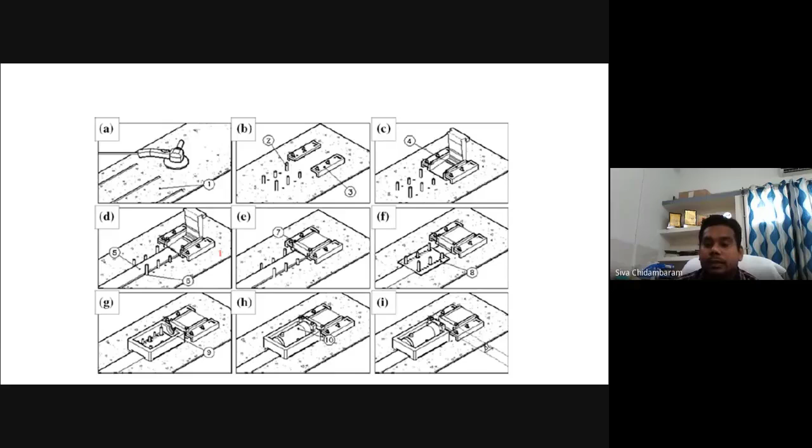The jack will be used to pull the FRP to a certain extent. By using the pressure gauge, we measure the applied pressure, and then it will be stuck together and anchored. This particular thing is for anchoring purpose.

This is for applying the pre-stress. Once it is pre-stressed, it will be anchored together. You can see here they are applying the pre-stress, and once the pre-stressing is fixed, it will be anchored using this bolting arrangement - it is perfectly anchored. The next day, you can remove the extra portions. So this is called pre-stressed FRP.

Predominantly it is being used nowadays in India, also in bridges and buildings having long spans. You can use this kind of thing because it is non-corrosive - externally it can be exposed to the atmosphere also, and the pre-stressing option gives you a lot of savings. There's no need to use a large number of layers, which can be reduced, and efficiency is also increased to a drastic level.

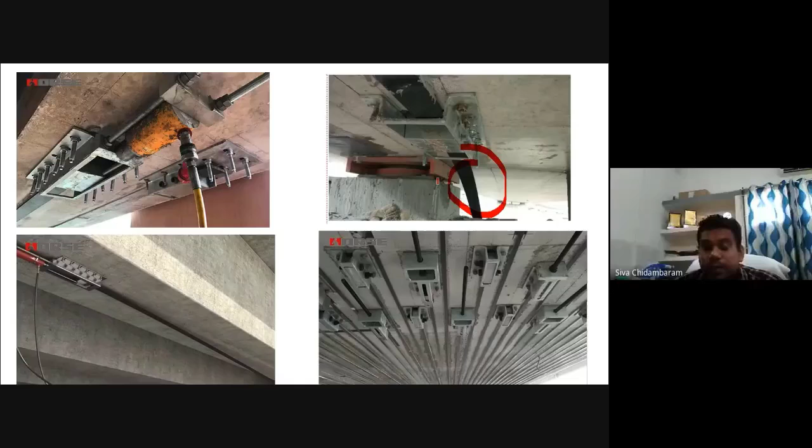So these are the advantages of pre-stressed FRP.

Next is base isolation technique. Here we use different materials like steel, rubber, or rubber with copper. Many materials are used. The building remains as it is; only the foundation-to-building connection is dismantled, and base isolation is used instead. This is called isolated bearings.

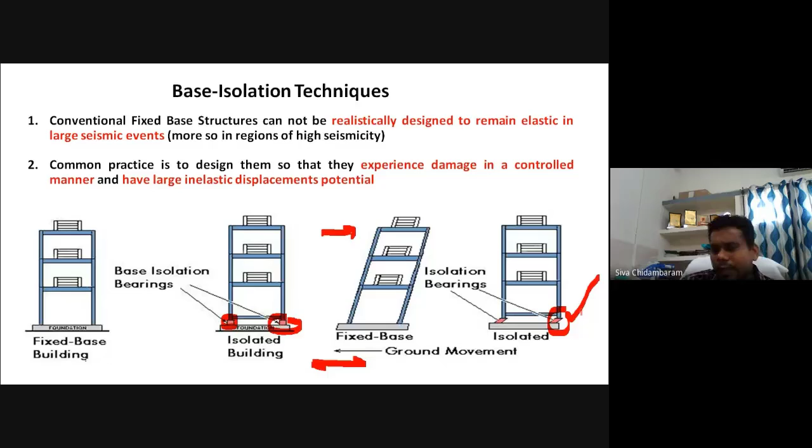Base isolation is not allowed for tall story buildings. It has certain limitations because when a tall building is subject to large wind force, it has a large number of mode shapes. So base isolation is restricted to a certain height of building; it's not suitable for taller ones.

So how does it work? When using base isolation, it generally does not allow the building to vibrate, so the building is not subject to large lateral forces. All the lateral forces are borne by the base isolator bearings, which dissipate the energy by deforming.

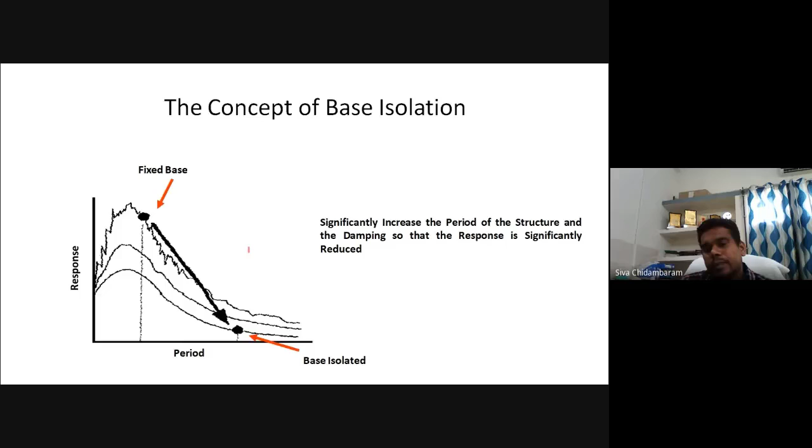In order to take the lateral force, they use a lead plug, and in order to take the gravitational force, they use rubber layers with stiffening plates.

We have to use these bearings exactly between the foundation and superstructure connections, not at the ground story. There are many types of bearings: elastomeric bearing, roller pin bearings, and ball bearings. According to the demand and requirement, we have to choose and use the right bearing for the purpose.

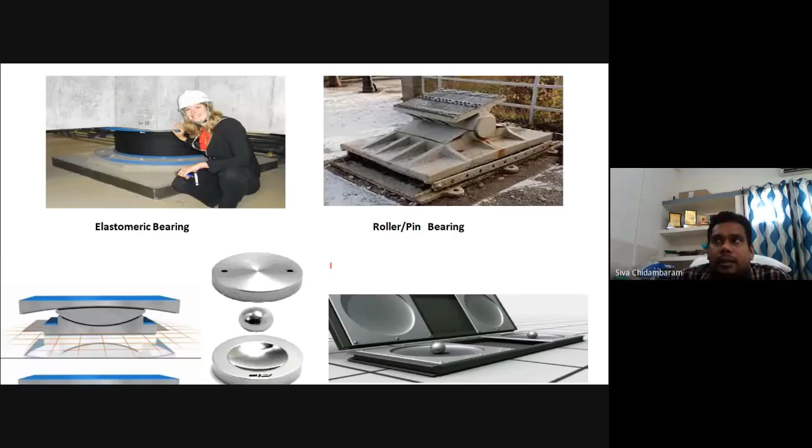Apart from this, we have another material called isolators. These are different types of isolators. Next is the active damping system.

You may ask, what happens with a large tall story structure? Tall story structures are subjected to a larger amount of wind force than earthquake forces—every day the building is subjected to wind force. So when constructing tall towers of 100, 200, or 50 stories...

...if you conventionally design the building using brick, concrete, etc., what will happen? The ground story beam depth will end up equal to the depth of the ground story itself, which is very difficult. So we have to reduce the self-weight of the structure.

So generally when going for tall structures, we don't use brick walls or concrete walls—there are none. Instead we use dry wall panels made using cement plaster board or fiber boards, and internally the wall has a vacuum space or filler materials like foam-based or glass wool-based materials. This gives thermal comfort and soundproofing, but it won't take load.

It won't take load—the load will be taken by the frame, and these wall panels just act as partitions. In such cases, we reduce the self-weight of the structure. When the structure doesn't have that much self-weight, it is subjected to a large amount of wind force, so it will deform.

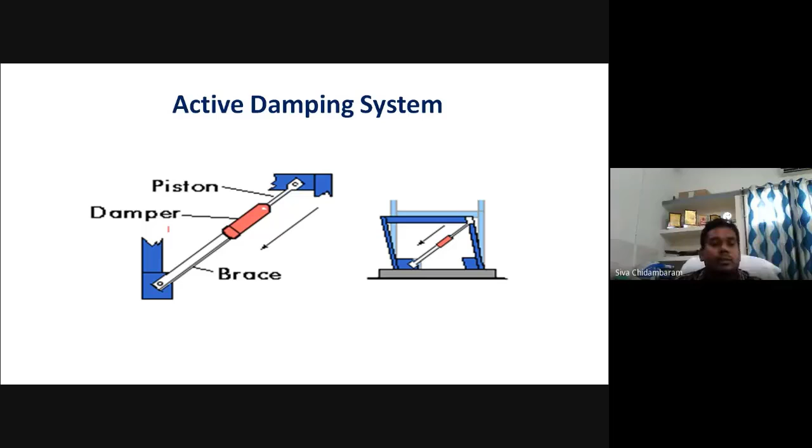The frame will receive the force, but all the energy will be transferred to the damper, and the damper will yield and absorb it. The damper should yield—if instead the frame yields because it's not designed properly, then there's no use in using the damper. The damper should yield so that through that yielding it dissipates the energy.

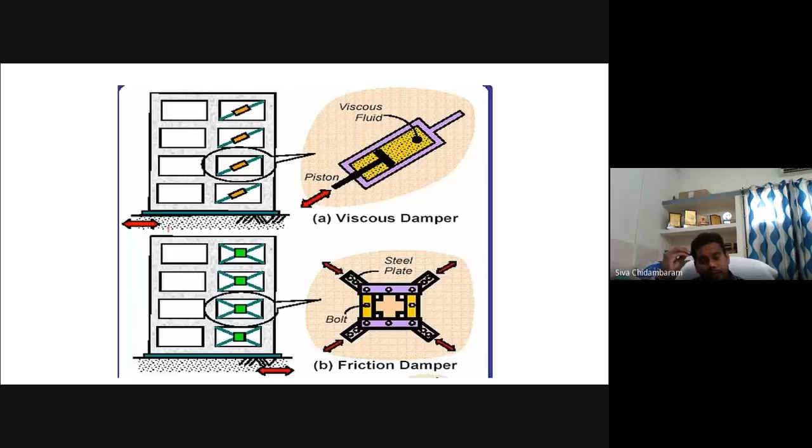A damper may be of many types: viscous damper, steel plate damper, X damper, frictional damper. You can also use damper with base isolation in combination. Instead of a damper, you can use bracing—normal bracing using steel angles or steel plates—that is also possible.

These are called slit metallic dampers, in which you have steel plates like this, in the form of I-shapes. Generally, the I-shape is meant to take the shear.

This portion will take the shear force, but it is very small in shape. So it will deform and take the shear force. Generally this web plate is meant for taking the shear force, while this supports the moment force. This is how it has been installed in the structures.

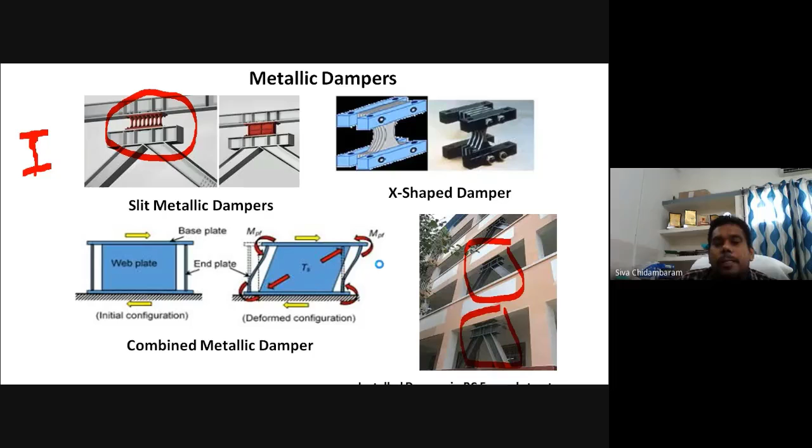These are the various types of dampers available, and they are being used in tall story buildings. When using this kind of dampers in tall story buildings, you can reduce the vibrations because of wind force, and reduce the deformations because of wind force. Tall story structures are subjected to wind force more than earthquake forces, so it is must to encounter these forces. These are the various ways of providing damping devices to control the vibrations.

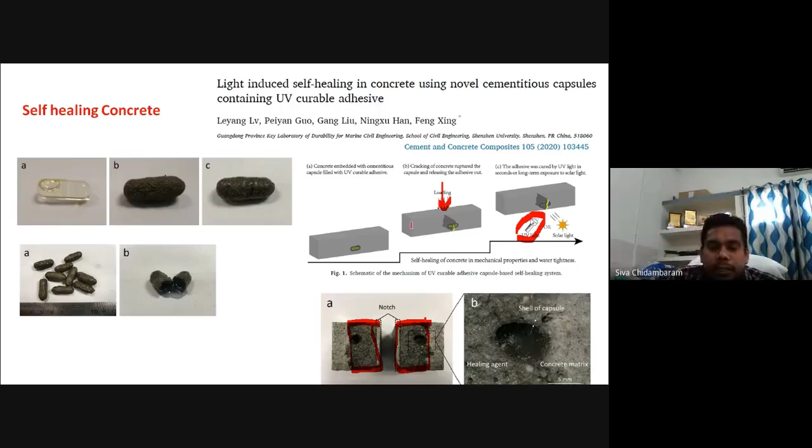Actually, there should be a continuation of the presentation, but unfortunately it is misplaced. So I would like to conclude my presentation with this. I'm happy to take questions from you. If you have any queries, please ask me and I will try to explain.